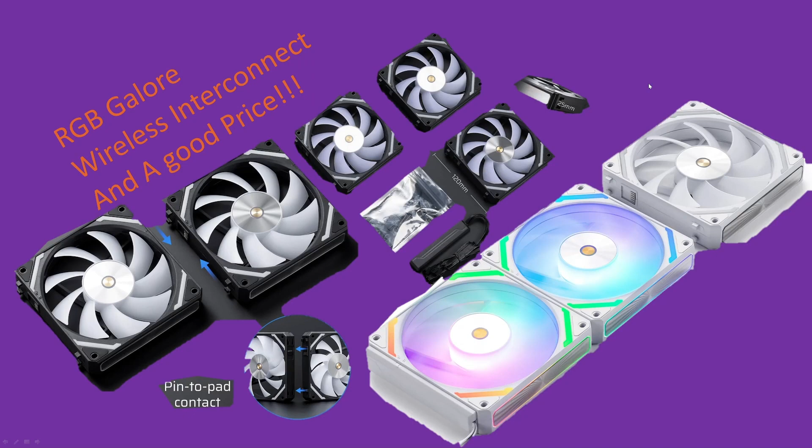I've got an illuminating video for you all tonight. We're going to be taking a look at the LTC CF-121D. It is a brand new RGB fan from LTC. Let's get right into it.

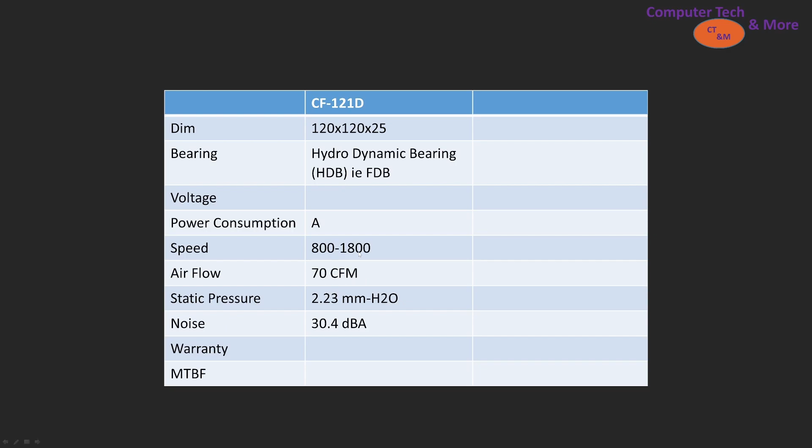First, a little bit of spec information. There's its name. It's a 25mm fan. It's got a hydrodynamic bearing, which is basically a fluid dynamic bearing. I couldn't find a power output or power amperage for it, but it does spin at 800 RPM with a maximum RPM of 1800. All right, now that we've taken a look at the specs, I want to do a quick open box.

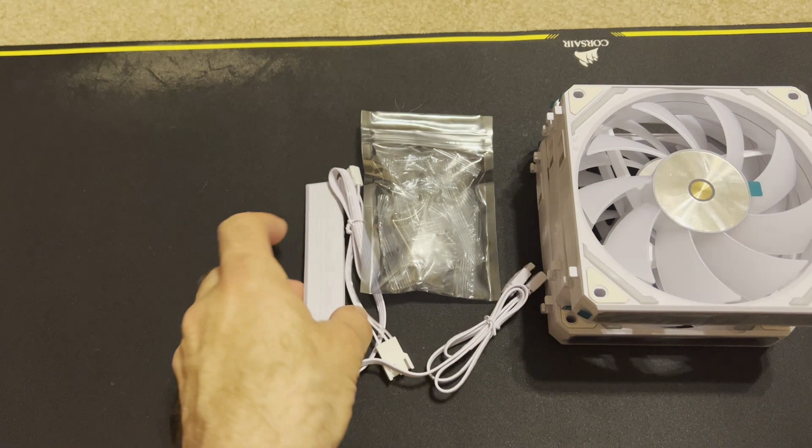So obviously the box is very plain and basic. That's perfectly fine. I see no reason to have fancy packaging, honestly, especially if you're selling on Amazon. This is the connection bracket that goes onto this side and it just slides neatly into place, and that works perfectly fine. It's got the plugs as well as the RGB plugs, and it just connects right into there and it transfers data right through it. So this really simplifies the connection process and being able to connect multiple fans to one fan header and then have them all be controlled at once.

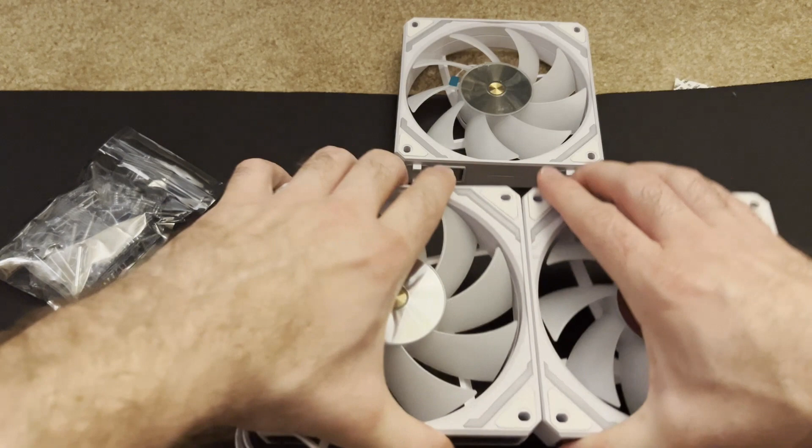Now, it does take quite a bit of force to lock the fans together, but they're fairly secure. Unlocking it equally takes a little bit of extra force, maybe a little bit more than I'd prefer, but it's fine. My other note is everything is done at a price, and perhaps this is just a less expensive way of doing it. It uses actual physical pins that slide into physical slots over there. So be a little bit extra careful with these and maybe not detach too many times, because you don't want to get these pins bent, because it would basically render the product non-functional.

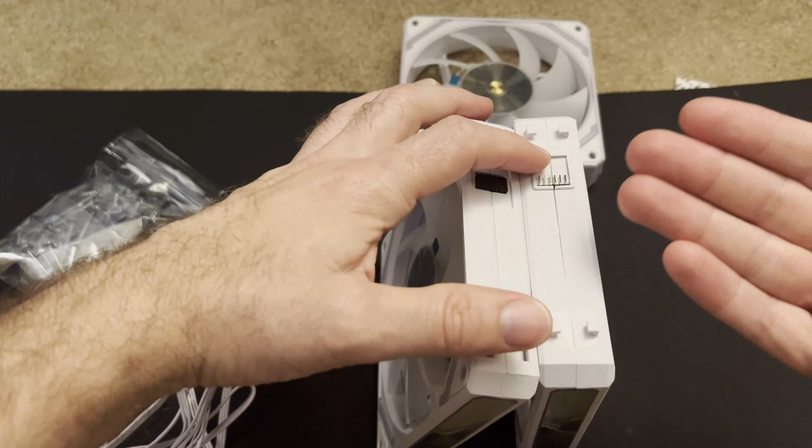So on the sides here, we got this nice shiny metal. So take a look at it. Pretty nice looking metal front on it. Got a little bit of texture there, so it might actually be machined. Pretty good mirror finish on it. Hub is about average for what we're seeing with modern fans. It's going to be RGB, some RGB around the sides. We're going to take a look at that in a minute.

Gap between the blades and the housing is about average. Blade design is focused more on an airflow style design as opposed to a pressure optimized one, just because of the gaps you're seeing between each of the blades. So as a radiator fan, it's going to probably fall behind the top end fans, but everything is at a price, and we'll take a look at value later on in this review.

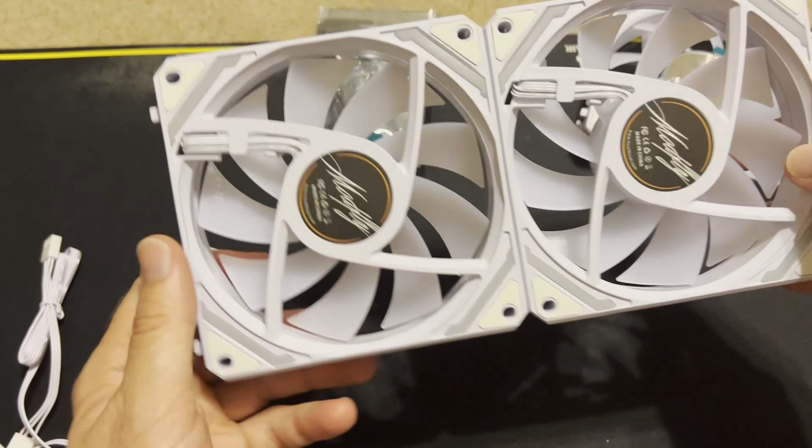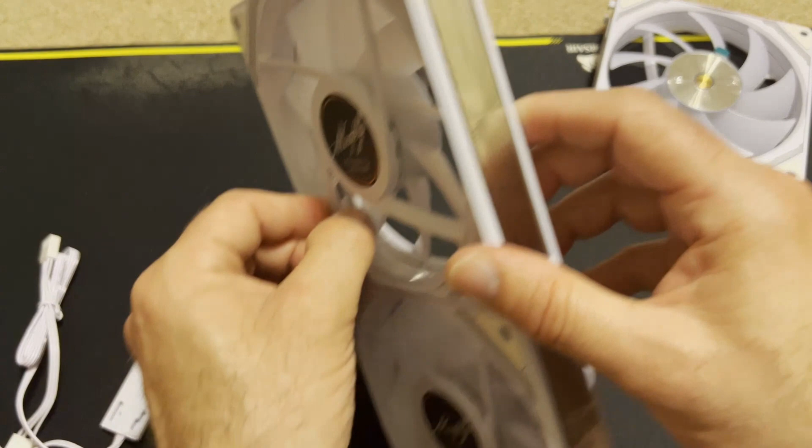There's the back of it. So it's just got a little bit of sticker on it. The wire cabling could be a little bit nicer. It's just kind of hanging out there in the open. It's very reminiscent of older style fans. Actually, Noctua still does that. I'd like to see them improve that in the future. The struts are nice and thin. No real complaints. They've got a good curvature on them to deflect the air, so it's not going to cause too much obstruction.

And one last thing that I'm noting as I'm taking a look at this, in the packaging, I only see one of these connectors, which means you're going to be plugging all these fans in together as one unit, and you would have to buy another one of these or figure out the wiring and make your own if you wanted to have these as like two in the front, one in the back, something like that. Otherwise you're basically stuck with using all three as one unit. So that's a little bit of a downside with these fans.

So that is one thing that LTC could do better, is include an extender or another one of these brackets to be able to wire a fan separately as an exhaust in case you were wanting to utilize this in a case that only had two fans in the front or something like that, just to increase the versatility of this kit.

First up in testing is the case simulation test. So first and foremost, the way to use this is, what size computer case do you actually plan on buying?

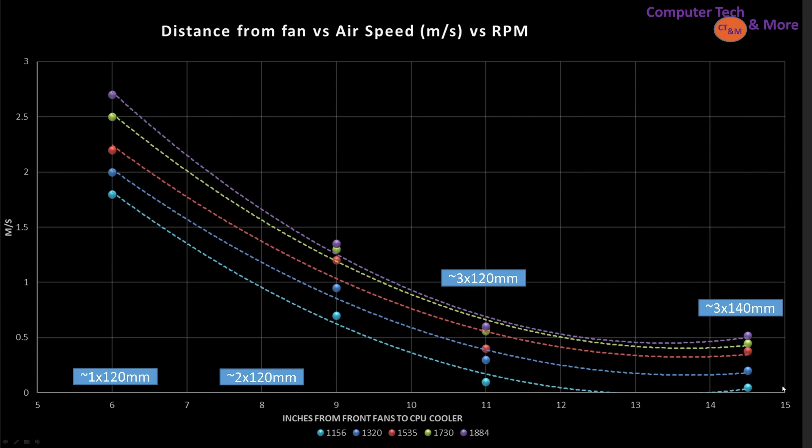Then we've got the 11-inch mark. 3x120mm class fans or the 360 AIO, so that's perfect for this triple pack. So strapping it to your AIO. And for this, you'd be taking a look at like Meshify 2C, Corsair 5000 series, something like that. And then for truly large cases, you'd be taking a look at the 14.5-inch mark. Here you'd be looking at cases like the Fractal Design Torrent, and it would be able to hold 3x140mm class fans.

So we need to compare it against something, and that would be my control fan. It is based 3 parts A12x25 to 1 part A14, creating a blended, what I'm calling a 130mm class fan. That's sort of the middle ground, best of both, or neutral of both worlds, between the benefits of 120s and the benefits of 140s.

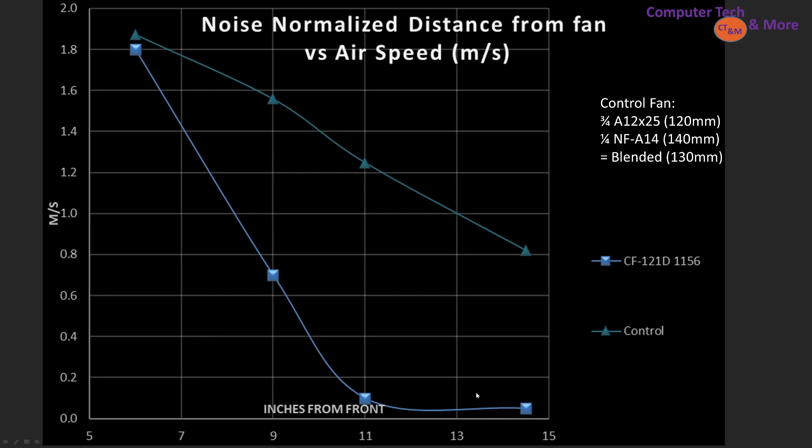So right away, this fan really isn't optimized for case airflow. It just drops off a little bit too steeply. So we're going to move on quickly. At 100% PWM fan signaling, it's still dropping off a little bit too steeply unless you're looking at smaller cases. So it's not really a strong contender as a case fan.

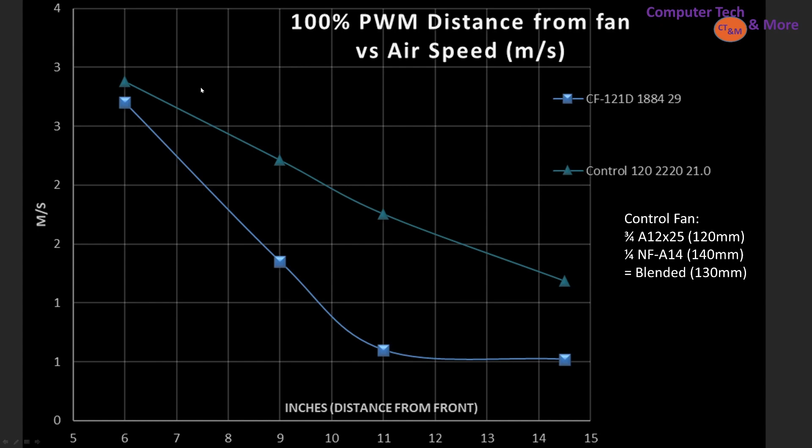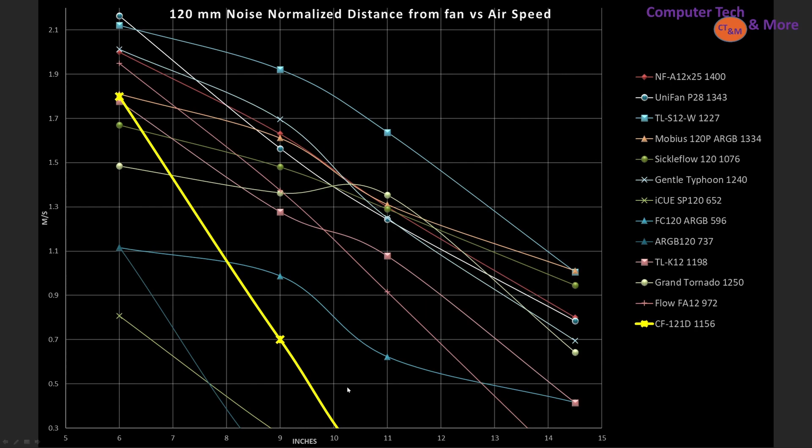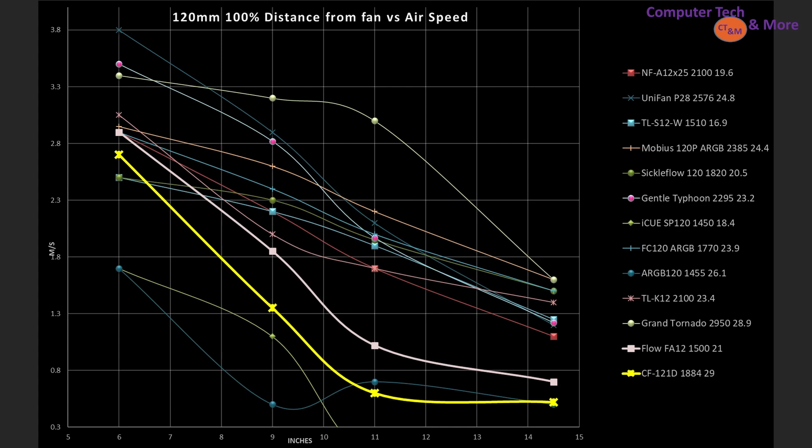But comparing against other fans, it starts off really well in smaller cases. So it would do well at a short throw distance, blowing up towards your GPU. If you were to put these at the bottom of your case blowing up, it would do fine at that job. But for bigger cases, it's just not focusing the airflow quite enough. At 100%, again, it's just dropping off a little too much. It's below a lot of other fans. Although, ironically, it's not much worse than the brand new Hyte Flow FA12. So, you know, it's in the right ballpark, I guess.

And in terms of noise versus airspeed, this is at the 9-inch mark. This sort of measurement could be taken at any of the measurement locations, but this is the one I decided on. So it's off the target spot. So you can see where most of these other fans lie. What I consider the best case fan right now is the TL-S12-W, and it's just a far cry. It's far too noisy at this decibels versus airspeed.

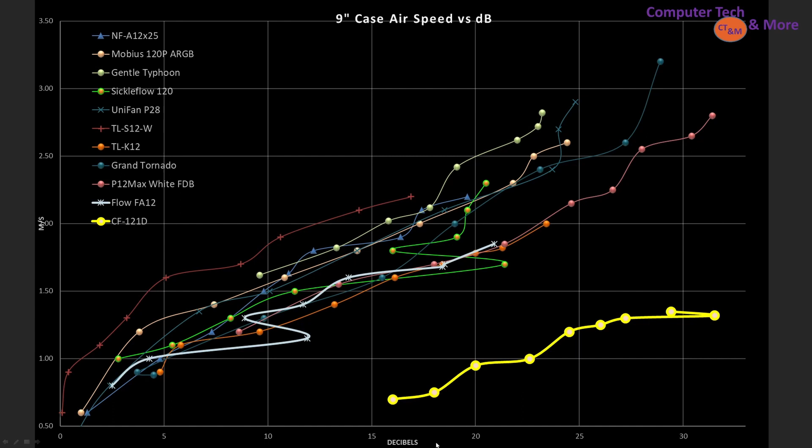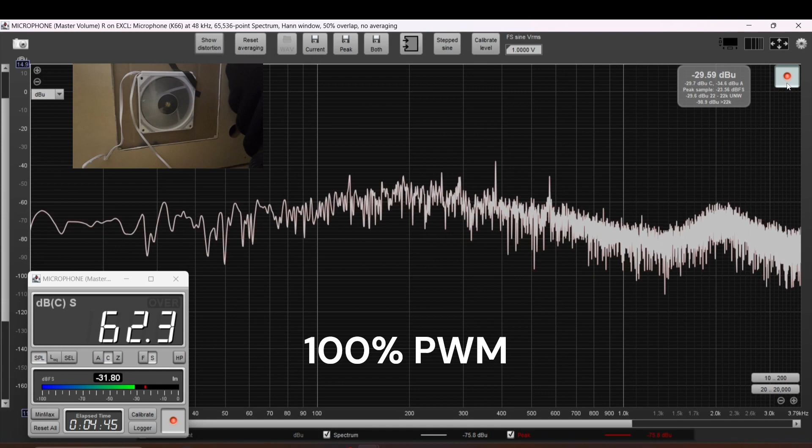Next, taking a look at the fan in air cooler testing, my cooler of choice is the Noctua NH-U12A. And as a note, I do have radiator in my testing now, and I'm finding that air speeds traveling through the radiator are very similar to the air speeds that I measure going through the air cooler, so I'm at this time calling them the same. But this sort of test should be very applicable for this triple pack, which is a lot of what this company's advertising this fan's application to be.

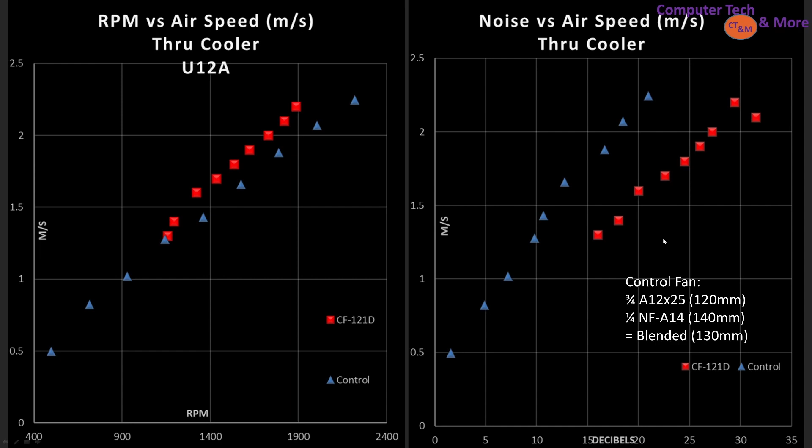And if we cross-compare it against a bunch of other fans, it's in the middle in my noise normalized results. It's not terrible, but it's also not a standout in this particular test at noise normalized values. Now at rip-roaring 100% PWM fan signaling, it's at 29.4 decibels by my readings. It's around the same noise level as the Silent Wings 4 Pro at its full speed.

So in terms of absolute performance-wise, it's a little bit on the lacking side. We're going to have to see how it does in the value. And in case you're wondering, here's decibels versus airspeed, decibels horizontal, airspeed vertical, and once again, we're seeing it's just a little bit on the low side of this graph, so bottom right is worse than top left. So it's just a bit noisy for how much airspeed it's moving.

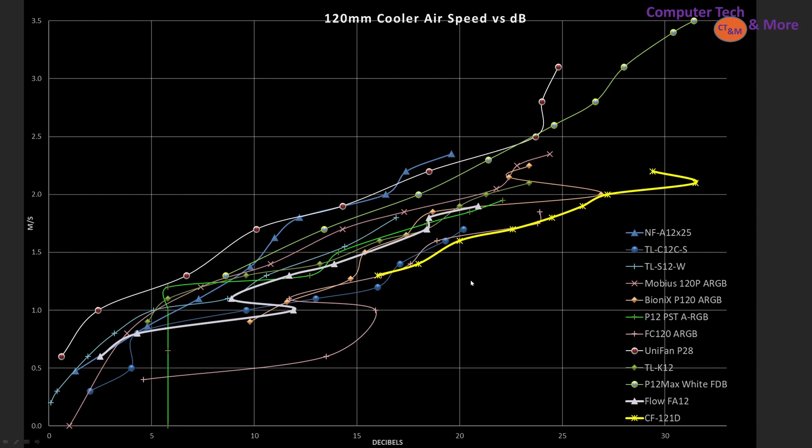Once again, taking a look at it in Sone, it's just a little bit on the noisy side for how much airspeed it's actually pushing through the radiator. And here's a brief look at the RGB of these fans. I just plugged them in and the fans are doing their own thing. The colors are not synchronized together, so it's not particularly uniform. That of course can be fixed in software, so it's perfectly fine.

And if we come around to the top, it has a little bit of a ring effect around that silver piece. Looks pretty good if I do say so. Plenty of illumination. The back here, keeping my fingers out of the way. Again, just have two of the fans plugged in. So again, here's the view from the back, now that I've put it down. It looks all right. I mean, that could look better, so they're definitely much prettier from the front.

So one really nice thing about these fans is I think I counted 10 RGB LEDs. So it's got plenty of illumination, and the more LEDs that are in it, the more even the lighting is between it. And if we take a look at it in rainbow mode, there's very good color mixing actually going on. So given this fan's price, that is a good amount of illumination. So if you like RGB, these are looking really good.

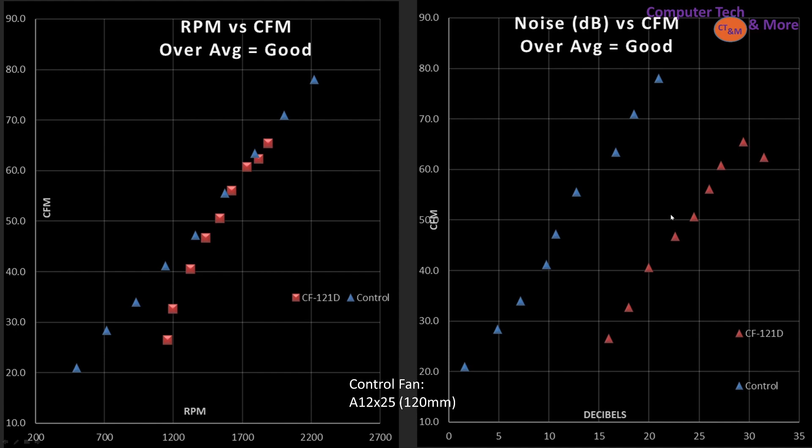My last test is RPM versus CFM. CFM is basically a scientific exercise. All that being said, this is how the fan performed at RPM versus CFM. It's lining up close enough to my control fan that its blade design is fairly effective. And decibel versus CFM, it's a little bit far off to the right side. It's just not quite keeping up in terms of noise levels.

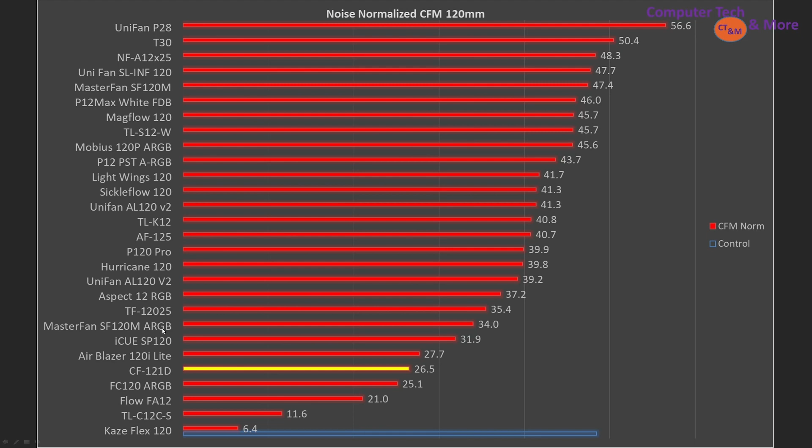And taking a look at it compared to other fans, well, it's pretty close to the bottom, so better be good value. And at 100%, once again, it's kind of in the middle. It's actually not a bad place for it to be for the amount of air, but it's just a bit on the noisy side compared to other fans around it with very similar RPMs and pushing very similar quantities of air. And here's its noise rating versus air movement.

Now, I will say, I don't want to say it's the best or the worst, it's not the worst, but there are other fans that also don't quite perform very well in this test, like the Flow FA12 does not perform well in this test, and the Air Blazer 120i Lite also did not perform particularly well in this test.

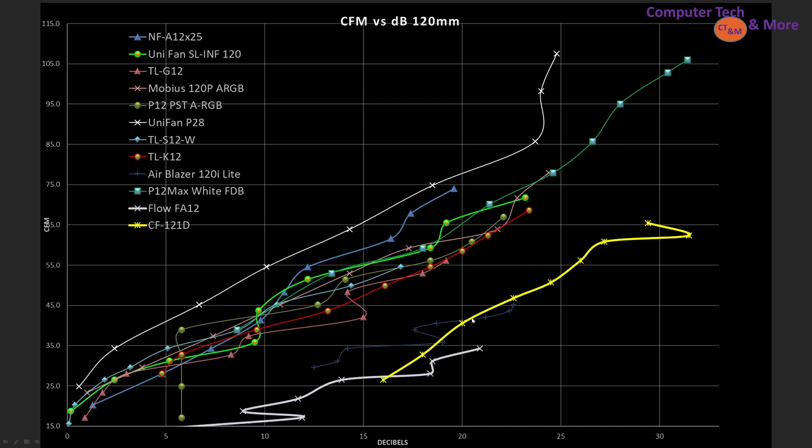Into value proposition. So retail price for this fan is $40 for a triple pack, which brings the fans to $13.33.

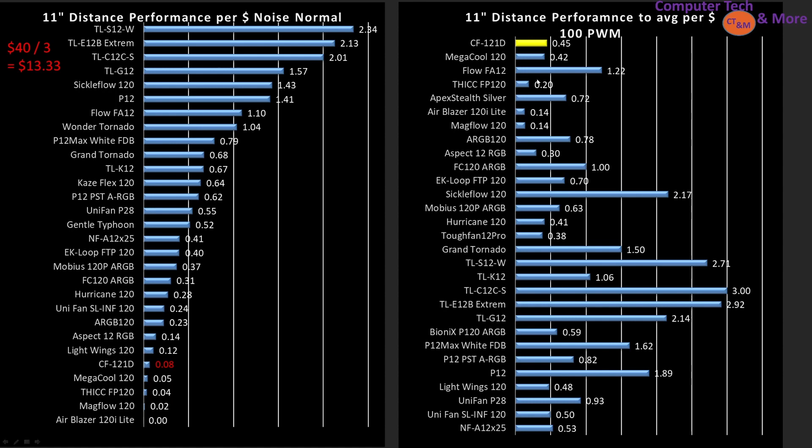So if you like more lighting, then the CF-121D might be a better pick for you. It all depends on what your particular performance needs are. And once again, it's up to you where you want to spend your money. And then a 20% discount, which is what I saw on Amazon at time of filming. That brings the fan down to $10.67. That brings its value way up, several places up, in a more acceptable manner.

So spending $32 on this pack is the maximum I would spend on it, personally. It just brings it to a better value, especially raw performance-wise. It's just not quite hitting the marks. But the LED lighting, if that's your thing, they look pretty good. All right, here's the raw data. The raw data does belong to me. Again, full disclosure, the company LTC did provide me the fans for free to do this review.